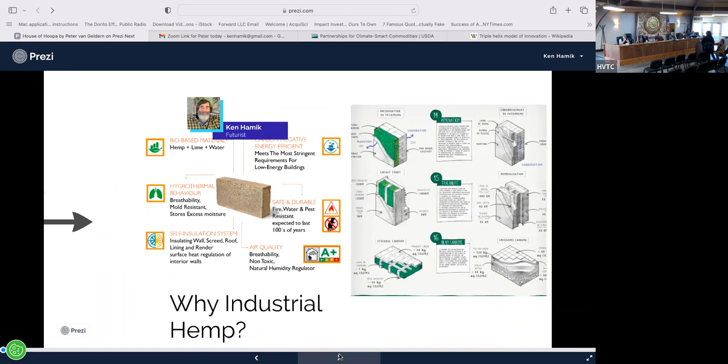But anyway, I want to introduce Ken, and he's going to go into some of his background really quick, because I know we only have 30 minutes with you, and then we're going to go into it with Peter directly.

Thanks, Lisa. So yeah, I'm kind of the regional futurist here. What does that mean? It means that I don't think about things in a quarter or a year, I think generationally. I think about where we came from a long time ago, how we got ourselves to where we are, and where we're going to go from here. So a lot of this presentation that we mapped out for you in this 30 minutes is about the past, the present, and the future.

The past, the earth is on fire right now, we're building and adding more carbon to a problem that's already a big problem, so we can't continue that path. Lisa approached me with this project, and all of my futurist bells went off in my brain. I share a chair on the President's Council at College of the Redwoods with Joe on industry partnerships, and I'm one of those people trying to think about the big pieces and how we move this to all of our benefit.

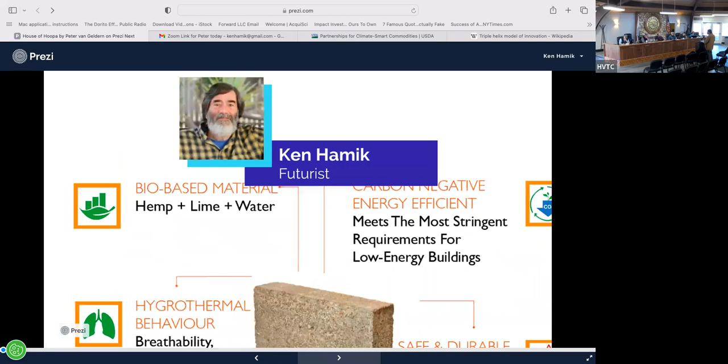But in particular, Lisa being Native and tribal, that is the best way to introduce this to North America. I would rather do it that way than any place else because this is regenerative technology. It's a generational play. What you're going to see here, especially with Peter Holmdahl, who's calling in from Paris today to talk with us, is that we've already hit a mark. This is not a proof of concept. These are going up high rises in Paris. They're carbon negative, actually taking carbon away. There's many advantages to it, but the thing that really hit us, being in a fire prone area here, is this is a fire retardant material and it's a natural insulator.

The European tests show 70% energy efficiency just because you put the wall in that's hempcrete. It's very comfortable. We asked the folks in Europe, how do you convince people to do this? As Lisa suggested with the Airbnb, just stay one night in one of these facilities. It breathes, it's more comfortable, and it really reduces the life of the energy costs for the people that occupy that space. The cost is actually going to be even less.

The construction costs are about comparable right now with what we're doing here with normal conventional methods. But if you think about how long these projects last, hempcrete will last over 100 years in many cases. There's thousands of years of hempcrete and natural material mixed with lime types of buildings that have been constructed. Some of them are still standing. So this is a different kind of an opportunity. It allows us to save a lot of money over the length of the life of that house or that structure.

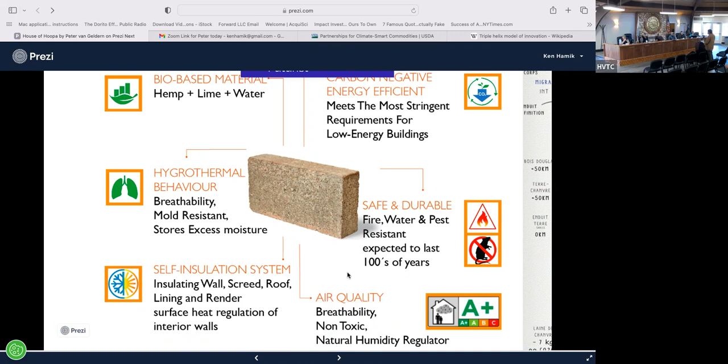So a lot of the things that we'll show you here basically are the answer. It's futurist. I cannot think of anything else other than hempcrete right now. By the end of the conversation, you'll see that I don't think there's any way I can go backwards. There's only forwards for me. This project is going to happen one way or the other. We've talked with people all over the world, and we're going to share some of those conversations with you in the next 30 minutes.

But I really want to just pass it off to Lisa real quick. Lisa, if you could, tell them about your visits to Paris and to France and these people that you met there.

Well, these are the who's who in this space. When I say that they're world leaders, these are the people that did it. And when I say hempcrete construction, there's a lot of hempcrete projects around—you're going to hear all over the place, people have built with hempcrete. What's different about what these guys did is they built the first hempcrete panel factory to scale the industry. So that's what we're proposing, is to help develop that piece here.

Deviler. Okay, Deviler. He's the mastermind. I mean, this guy is—you guys got a brochure a little bit earlier, Tradical from the lime company. They're the largest lime producer in the world for hempcrete construction. This guy is the brain trust. He understands and knows the whole supply chain. He knows everything about this industry and has been a mentor to Peter throughout his time in this space.

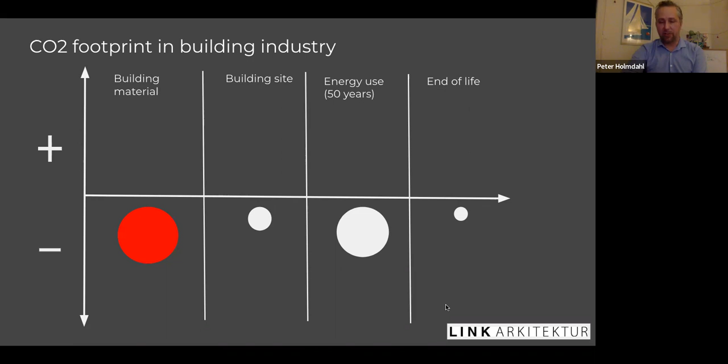This graph shows that in Sweden, we've cut down a lot on energy, but actually our building materials are what emit more CO2. This red dot you see emits more CO2 than the energy use over a 50-year period. So you can build energy efficiently, but you need to know what kind of materials you're building with.

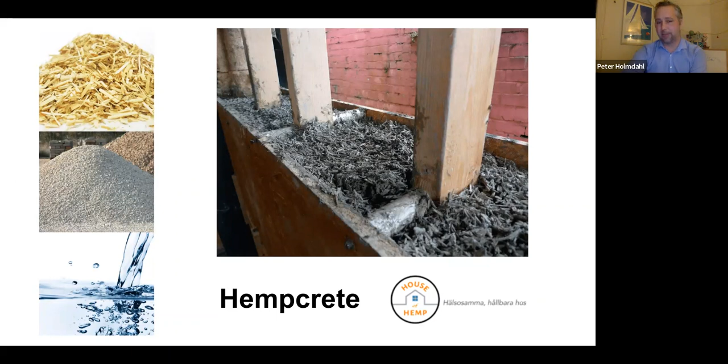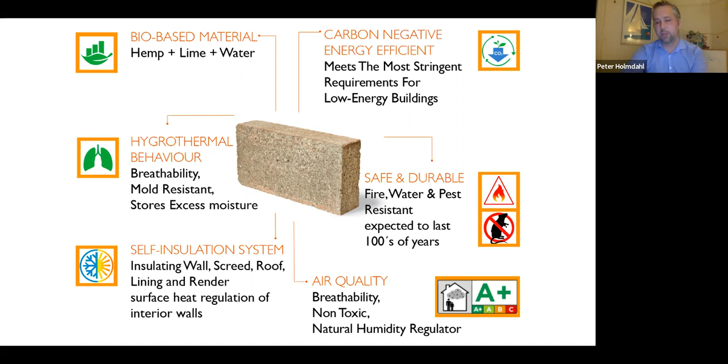Then we can build the panels I'll show you at the end, and how you can apply this quickly to start building healthy houses that last a long time. As I said, they'll last for 100 years. They're carbon negative, there's no plastics, no toxins in the walls, so you get a really healthy indoor environment. No rodents or termites will get into the walls, and they'll keep the heat in during winter and out in summer, so they work in both conditions.

I'm sure you know a bit about hemp, but it's an easy crop to grow. It's the second fastest growing crop in the world after bamboo—about 12 feet in 4 months—and it will store 4 times the amount of carbon compared to wood. So you really get carbon storage into your buildings. All of a sudden your buildings become part of the solution rather than the problem.

Going into more detail, what we're after in the hemp hurd is on a micro level—it's the pores in the hurd that can absorb and release moisture. So you get these healthy walls that can absorb and release moisture, giving you a very healthy indoor climate and also avoiding mold.

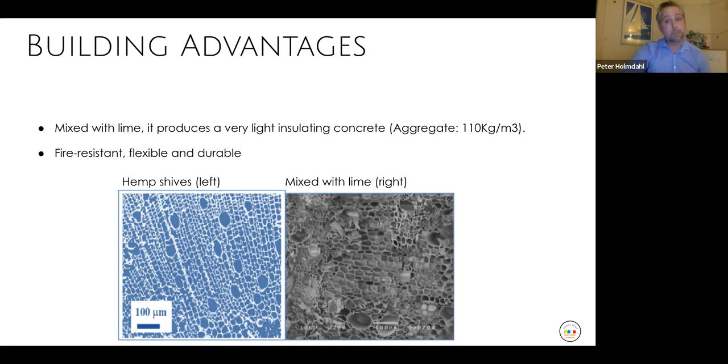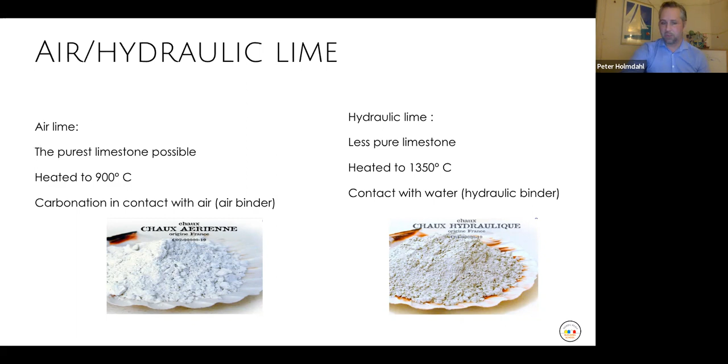Then you mix it with 2 different kinds of lime, mainly air lime, which is much closer to what the Romans used to use back in the day, and a certain amount of more modern hydraulic lime, closer to Portland cement. But the main point is that the air lime you use is much closer to what was used to build buildings historically—it's more elastic and handles moisture the same way. So you get buildings that will last for a long time and stay healthy for a long time.

So what can you do with it? Just about anything. Office buildings, renovations, several-story apartment buildings, single-story houses, anything you want.

It's an insulation material. This is a castle in Luxembourg that was renovated, had mold problems. They put it on the interior of stone walls, cut down their energy bills, came out very healthy.

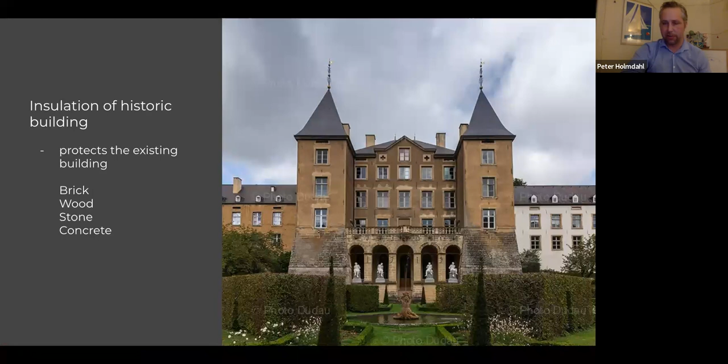The biggest project in the world today is in northern France, where they're renovating 23,000 houses and putting 4 inches of hempcrete on the interior. These are UNESCO heritage houses, 1-layer brick. They're doing this because in the long run it's going to keep the energy bills down and it's going to be healthy and long lasting.

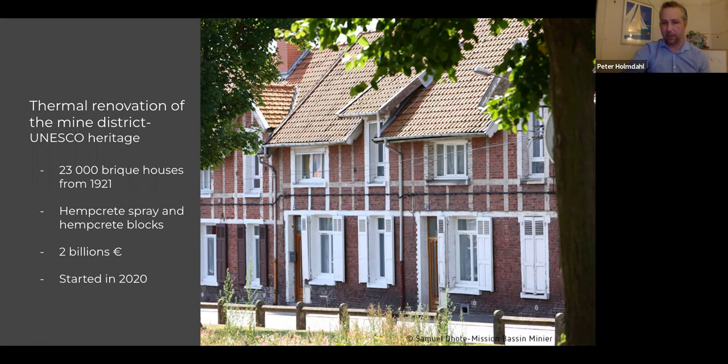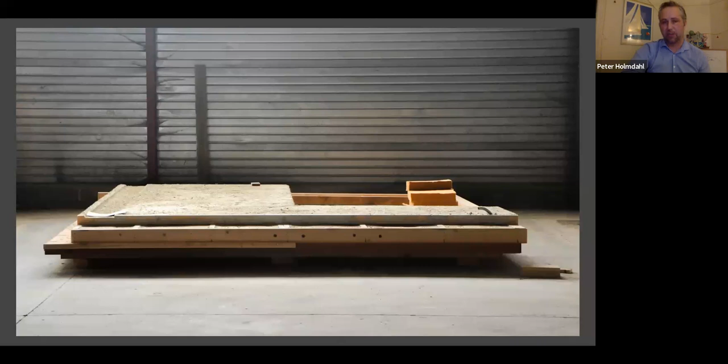But where the market has moved to are these prefab panels, and this is what we're going to get to. This is a picture of them. But you can build just about anything.

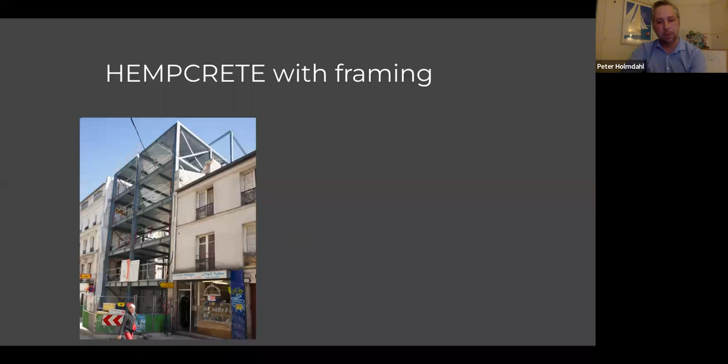This is a 6-story building in Paris, built in 2014, with a steel frame in this case. This is social housing. So you build a steel frame, put on a wood frame, and you fill it up.

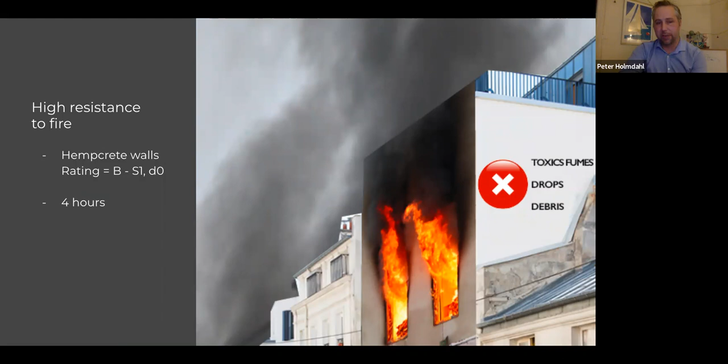And this is where it gets interesting. It's a bio-based material that will manage 4 hours in a fire test. The reason you say 4 hours is after 4 hours they turn off the machines, they don't do testing after that. It's enough. But a picture or pictures say more than 1,000 words.

This is the interesting part - it's a completely fire retardant material. And with California and your wildfires, this is a way where we can start convincing insurance companies that this is the way forward.

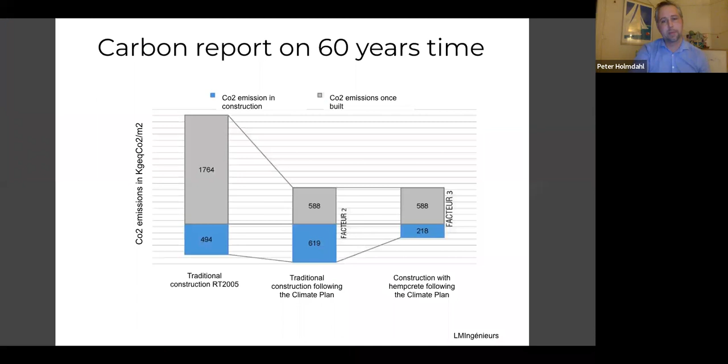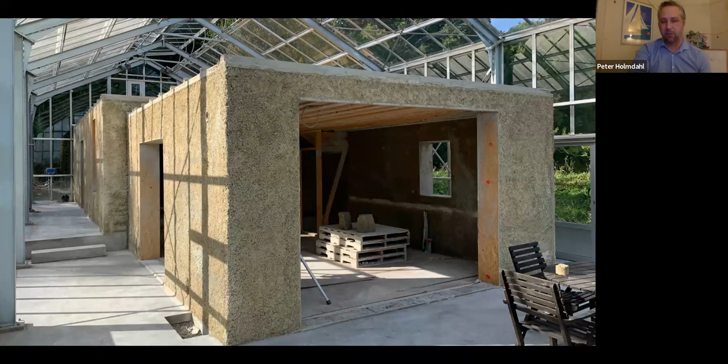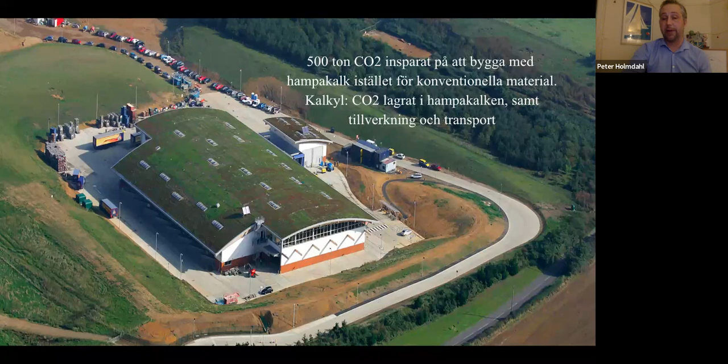Marks & Spencer is about the equivalent of Costco. Their largest department store outside of London is built with this material and prefab panels.

And then we get to the French, and Paris, and what Lisa was mentioning earlier - Laurent Mouly, who we're working with, the architect, and some of the several-story buildings that he's been building in Paris.

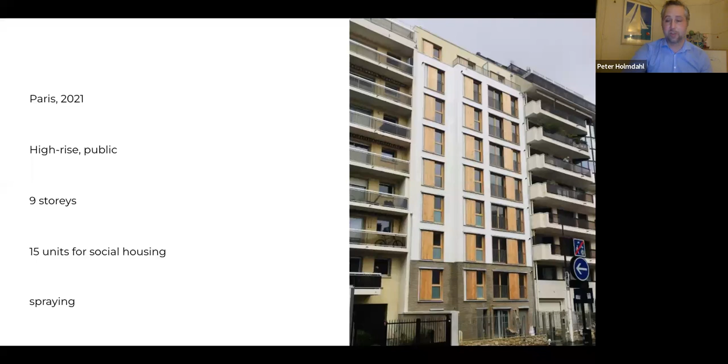So this is the building that Lisa was in front of with him. The latest was a 9-story, and what they're currently working on is a 15-story building.

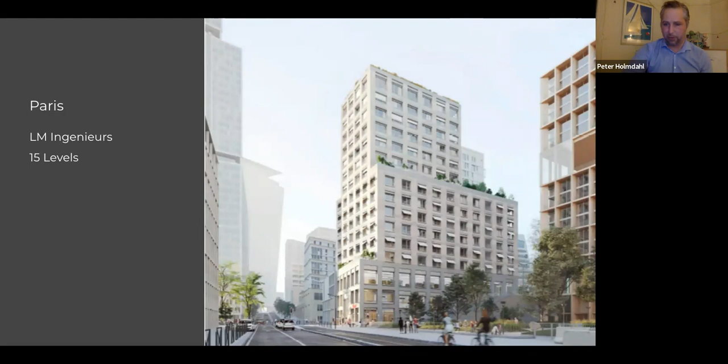So really no restrictions. In 2024, the Olympics will be coming to Paris, and a part of the Olympic Village will be built with hempcrete as well.

This is what we really want to talk to you about. In May of 2021, they started up a factory just outside of Paris called Wall'Up. It produces large quantities of hempcrete panels.

It's wood frame, and you mix the hemp and lime, and you create these panels where you can assemble the buildings in a matter of hours. So this is tested, it's proven, it's shown.

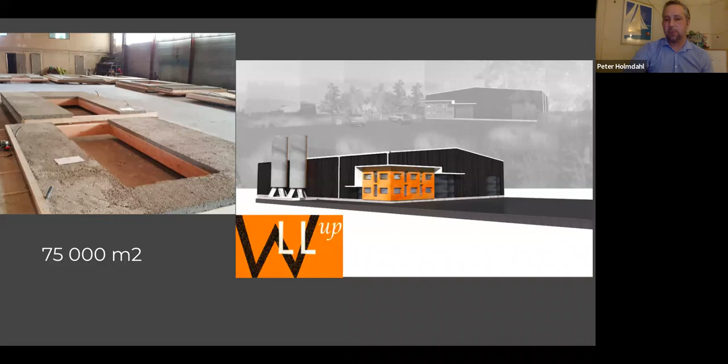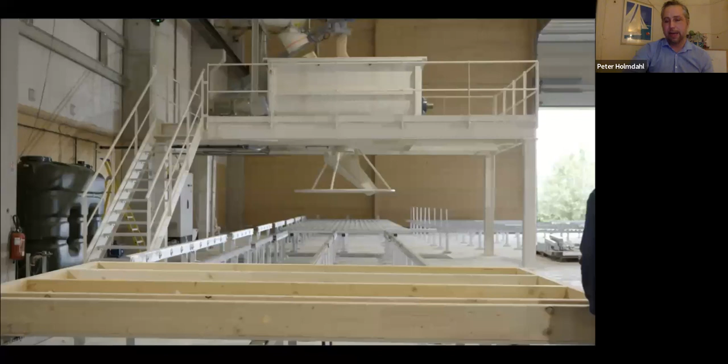And so you have these wood frames, you pull the electricity through. If you want any water, you do that too before you fill it up. And after a couple days, you'll have a panel that's relatively dry and ready to go.

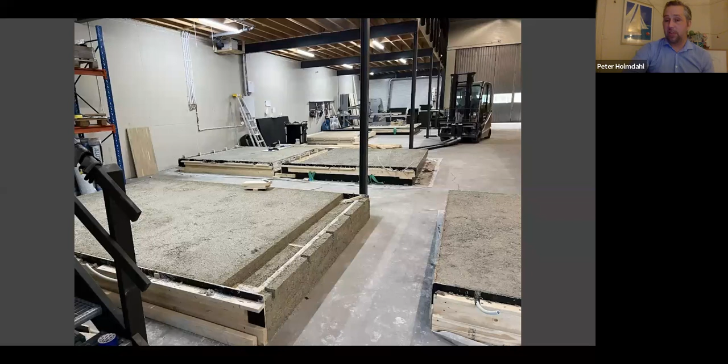We started doing the same. So these are pictures from Sweden and a house that we built with Sweden's most famous architect, who among other things did the Swedish embassy in Washington, DC. So these are panels that we built on a factory floor in Sweden.

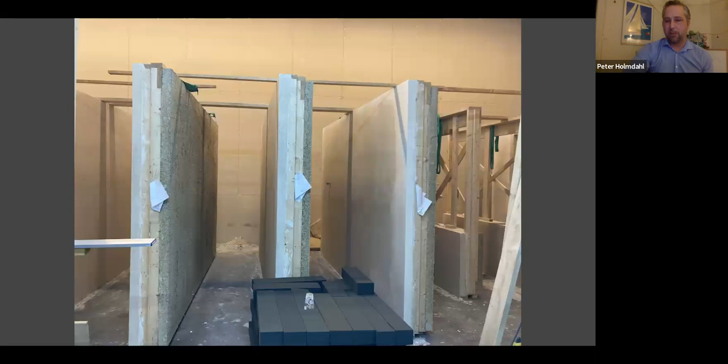We started this way, and then we're going to build it to a next phase to be able to build quicker. But the panels were lying down, we filled them up, and then they were stood up drying. And we brought them out to a work site, or to where the house is.

And a 2,000 square foot house was assembled in 10 hours. So that gives you an idea of the speed of the build.

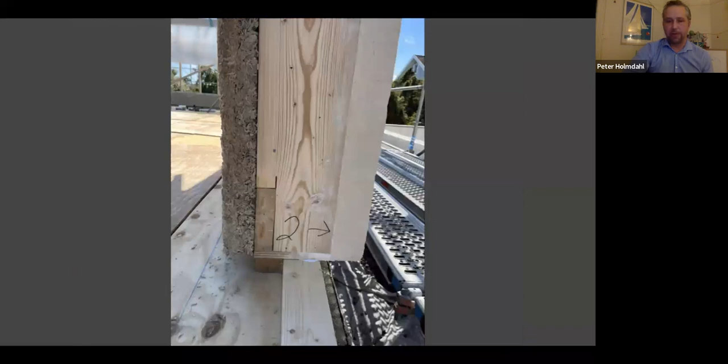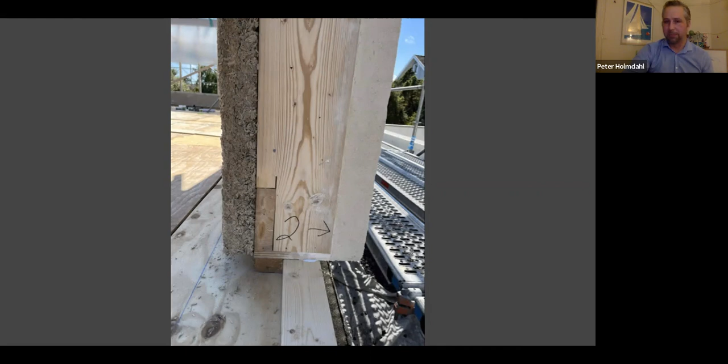So just wood frame, hempcrete from the interior to the exterior, no toxins, nothing in the wall. Easy assembly, normal drill bits. And you get a long-lasting, healthy house.

So that was what I want to share with you. I'm very happy to answer any questions at the end of this, but I know that Ken and Lisa have a little more to go through. So I thank you for your time now, and look forward to answering any of the questions you might have.

So again, this is not a proof of concept. This is done, and it's being done all over the world. I just want to point out the Australian project that Peter showed a picture of briefly. They were putting one of these structures up really quickly, like it goes fast. And it was a really hot day in Western Australia, 104 degrees Fahrenheit outside. They were finished with the build, and it was 70 degrees Fahrenheit inside the building.

No air conditioning, no airflow, just the nature of the material. So not only fireproof, but that. So the sustainable aspect of this is a futurist approach. This is a no regrets strategy. I do scenarios for a living, so it's like playing a game. What happens if, how could things go wrong? And I think we saw a lot go wrong with supply chains recently, and I don't think that's going to go away. So I think that's a big part of what we're about to do.

So we're proposing this EU approved building material that's already been ICC approved, which means it's approved for international building. We can bring this to North America now. There's no one else that's really doing this.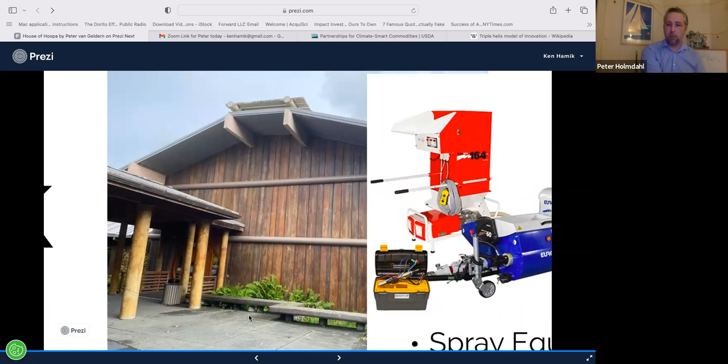Well, in phase one, it would be the machinery that you would see over here on the side, which is a spray machine, but it's plenty big enough to start building the first couple houses. So what we're proposing is a machine with hemp and lime, enough hemp and lime to build about 2,000 square feet of whatever buildings you would be interested in building. But not only that, we'd also come over, a couple of us from Europe in at least 2 different stages. So we could be there to first build and then to be there to assemble as well.

But to start doing the knowledge transfer, to start doing, among other things, building a hempcrete school, teaching people how to build these panels and teach them how to renovate as well. So the first phase would be materials to get one or two houses up.

As well as getting people there, and you could do groups of up to 20 people that we could teach at any given time. And then you can go through these different phases, but the final phase, you can either go directly from phase 1 to 2 to 3, or you can take it gradually. And the difference is the size of the machinery.

But phase 3 would be basically a full-scale prefab factory. So you would be talking about being able to do at least a house a day in a prefab factory setting. And from what I've seen in pictures and heard, you guys have the facility, you have the knowledge of the wood, and assembling the wood panels would be an easy lift.